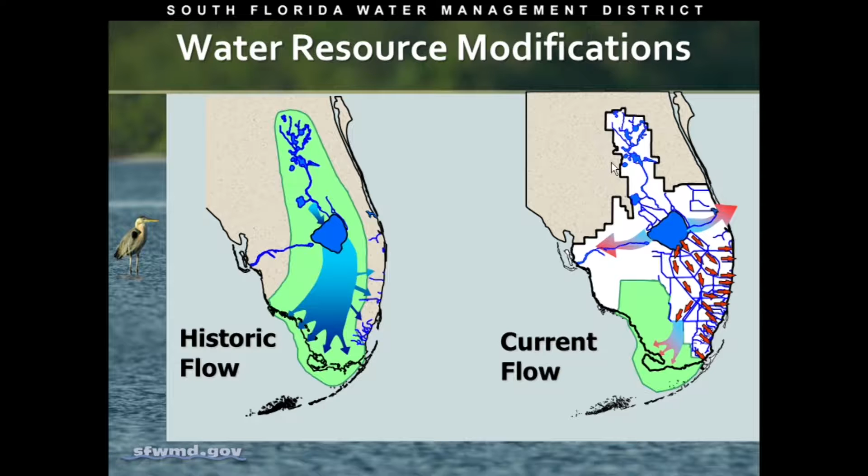The major watershed in South Florida is the Kissimmee-Okeechobee-Everglades watershed, where historically water fell and the Kissimmee chain of lakes went through the river into the lake. The lake would rise and overflow its southern boundaries, then go through the River of Grass very slowly, ultimately into Florida Bay and the Atlantic Ocean. Today we have a man-made system with the Central and South Florida Project, which has changed that delivery very greatly.

So what caused that change? Why did we have to construct that project? The historical problems leading to that were mainly the hurricanes of the 20s and the 40s. The state at that point in time asked the federal government for help. They came down and started constructing the project, which was authorized in 1948.

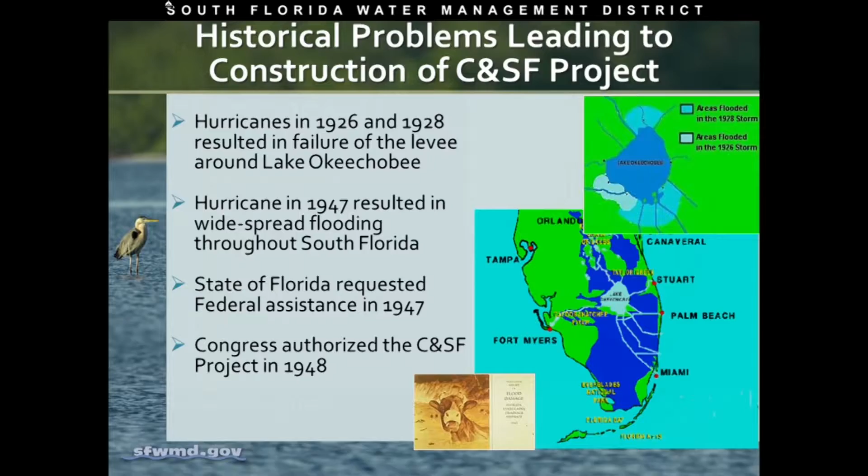The major components of the project include channelization of the Kissimmee, the St. Lucie, and the Caloosahatchee rivers; the construction of the Hoover Dike; the construction of the conservation areas, which compartmentalized them; the construction of protective levees around the Everglades Agricultural Area and the lower East Coast; as well as the construction of the drainage network, which are the canals and the salinity structures associated with them.

This is our little portion of the Central and South Florida project here in the Treasure Coast. We have the C25, the C24, and the C23 canals, and we also have the C44 canal, which is the only canal connected to Lake Okeechobee.

We have the salinity structures to the east. We have the S80 structure, which is the lock structure, and then there's the S308 structure at Lake Okeechobee, which is the structure that needs to be open for water to flow into the C44 canal and ultimately into the St. Lucie estuary.

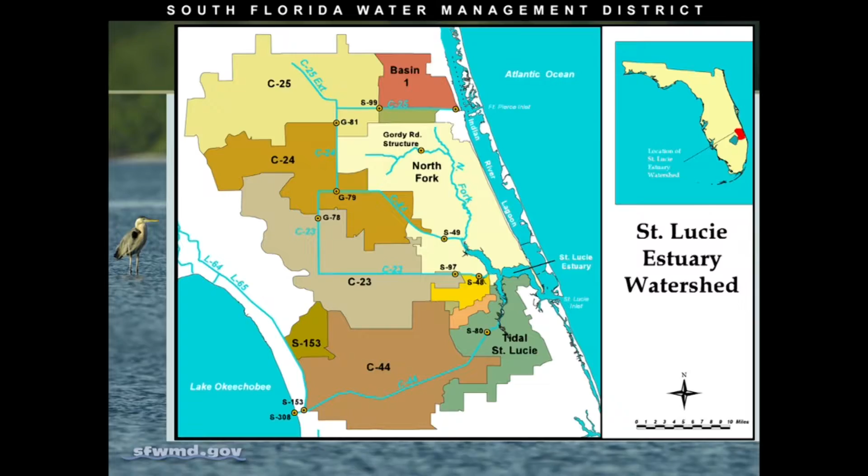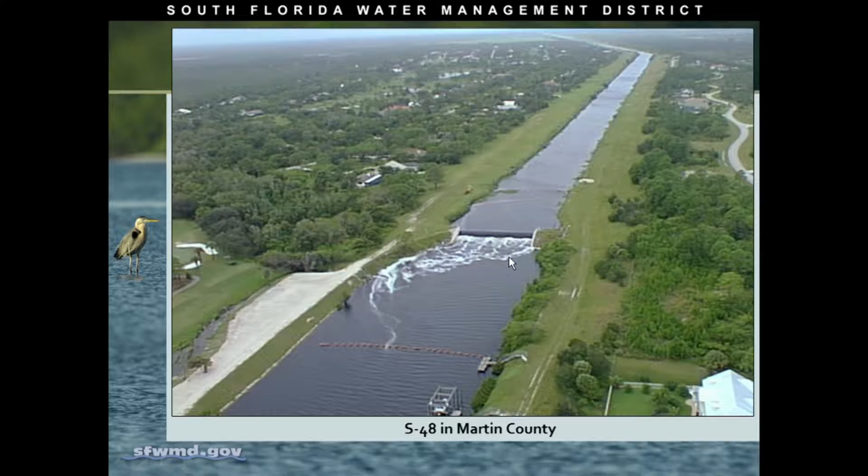This is the C23 canal, and what I wanted to show you here is the salinity structure. Each of our canals have these structures. They're non-movable structures, and they protect our water supply system from saltwater intrusion.

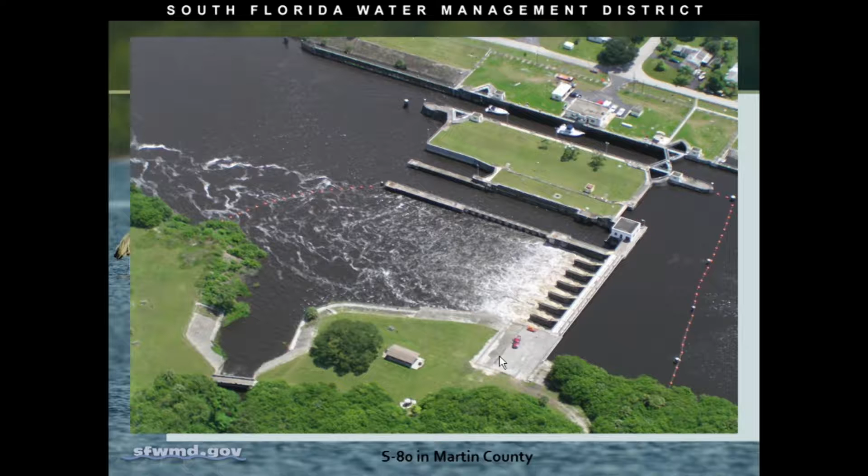This is the S80 structure in Tropical Farms. It includes the locks here, but also the water control structure, which in this picture is flowing. But just because it's flowing does not mean it is water from Lake Okeechobee. You would have to drive 27 miles west to see whether the S308 structure is open. If that structure is open, then this would include water from Lake Okeechobee. If it's not, then this is just providing flood protection for the local C-44 basin.

The Water Management District's core mission is flood protection, water quality, water supply, and natural systems, and there are five water management districts in the state.

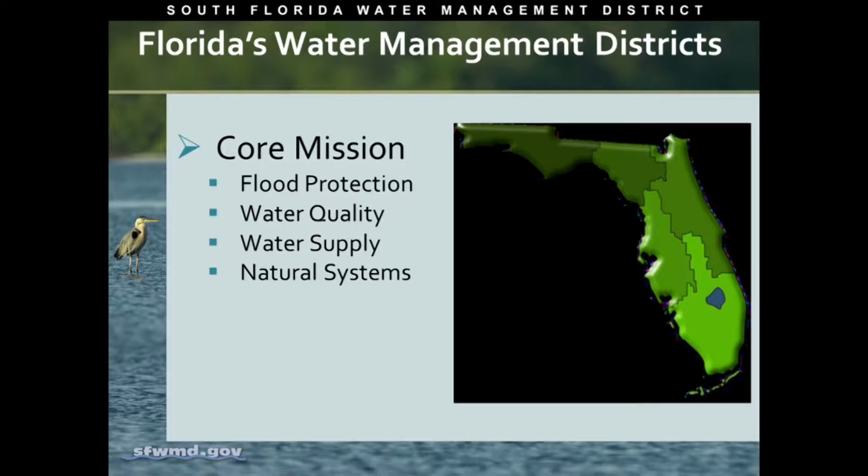The South Florida Water Management District includes 18,000 square miles, 2,100 miles of canals and levees, more than 600 water control structures and project culverts, 70 pump stations, 8.1 million residents, 3 million acres of agriculture, and vast areas of natural area.

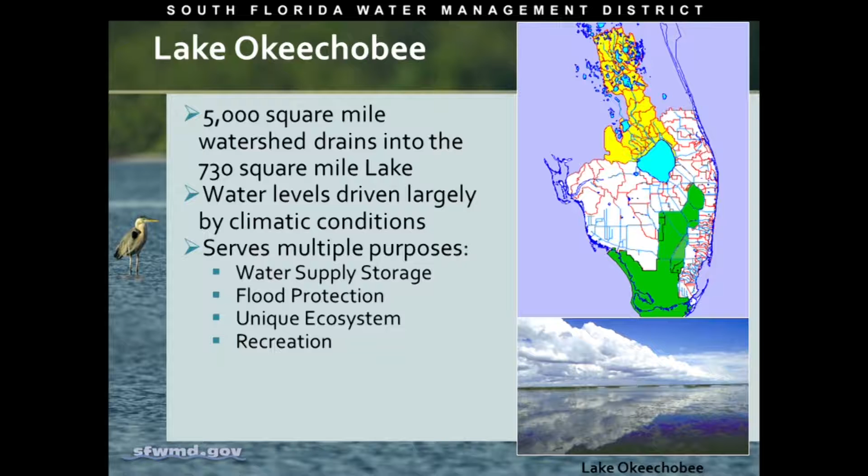At the heart of our water management system is Lake Okeechobee. It has a 5,000 square mile watershed, which is in yellow here. The lake itself is 730 square miles. It is a very shallow lake of about 12 feet. The water levels are driven largely by climate, and it serves multiple purposes.

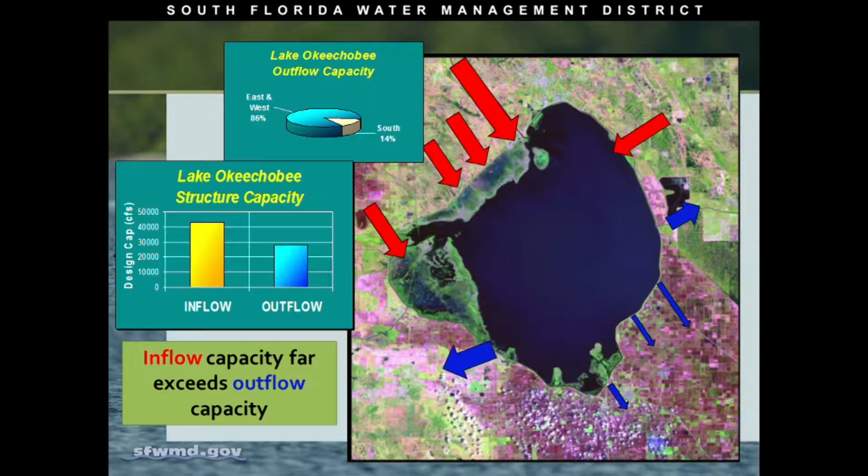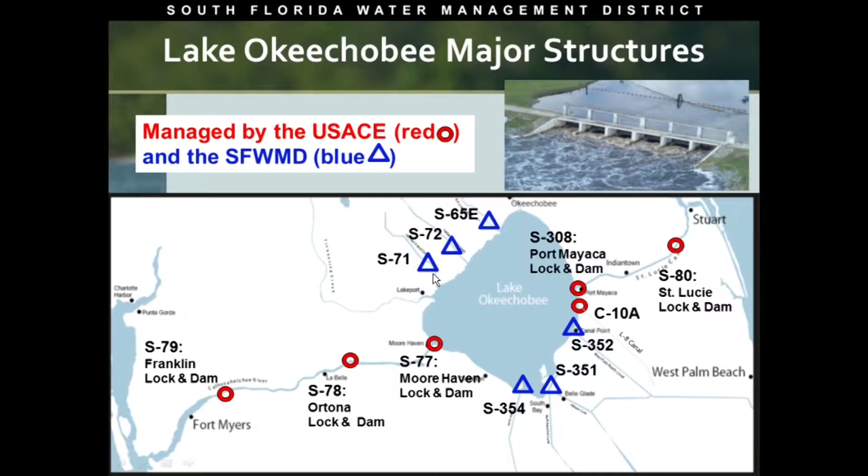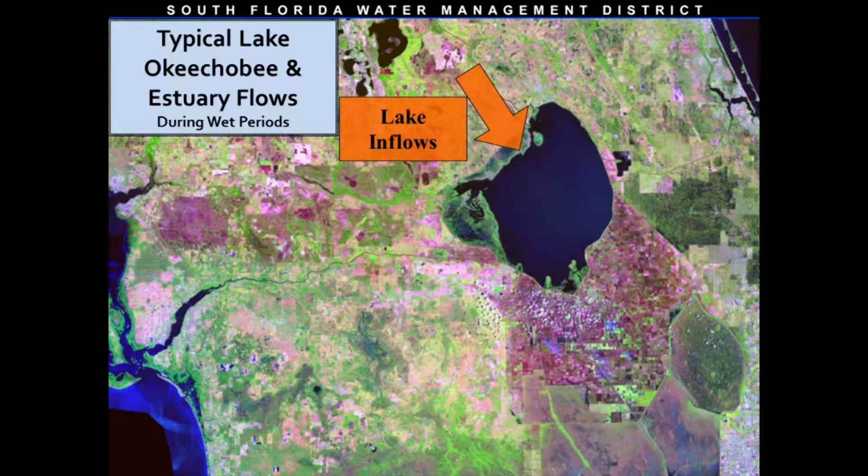I'm just going to give you a scenario on what happens with the system. So if it's raining in Florida, water comes together and goes in the Kissimmee chain of lakes. It gathers, it gets into the Kissimmee River and flows into the lake.

Runoff also gathers from the EAA, or the Everglades Agricultural Area, goes into the canal system and starts moving south. At this point in time, the lake water is released from the lake through the EAA into the water conservation areas through the stormwater treatment areas.

There's also basin runoff from the C-43 basin, which collects into the canals, goes out the S-79 structure, meets up with the tidal basin runoff, and eventually goes out to the Gulf of Mexico.

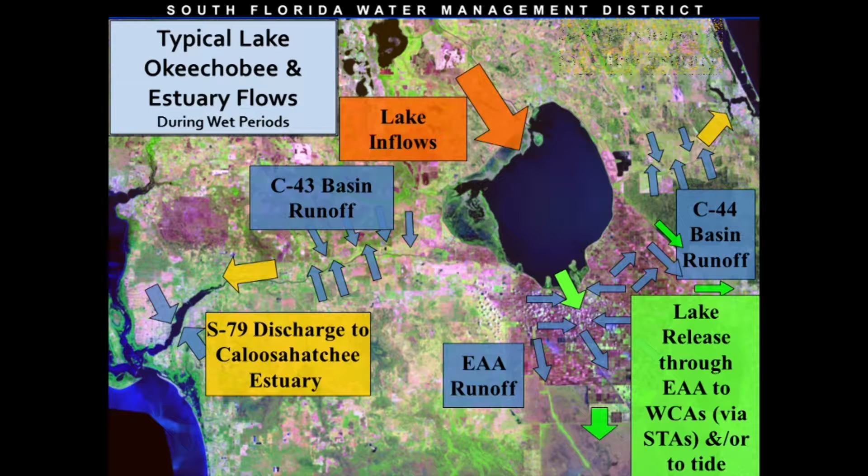The same thing happens over on our coast. The C-44 basin runoff collects, goes into the canal, goes through the S-80 structure into the St. Lucie estuary, where it meets up with the tidal basin runoff and goes into the Atlantic Ocean.

At this point in time, the system is totally full. It's working, it's doing its job, but it is full. The problem is it hasn't stopped raining yet.

So what happens at this point in time, because more water is coming into the lake than can go out, that's when they tend to open up the S-308 structure, which provides way too much fresh water into the system and aggravates the estuary. The same thing happens on the west coast through the S-77 and the Caloosahatchee.

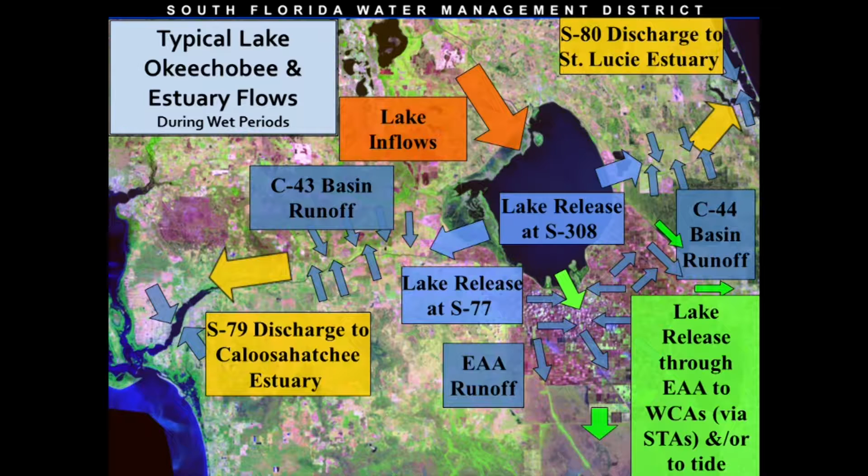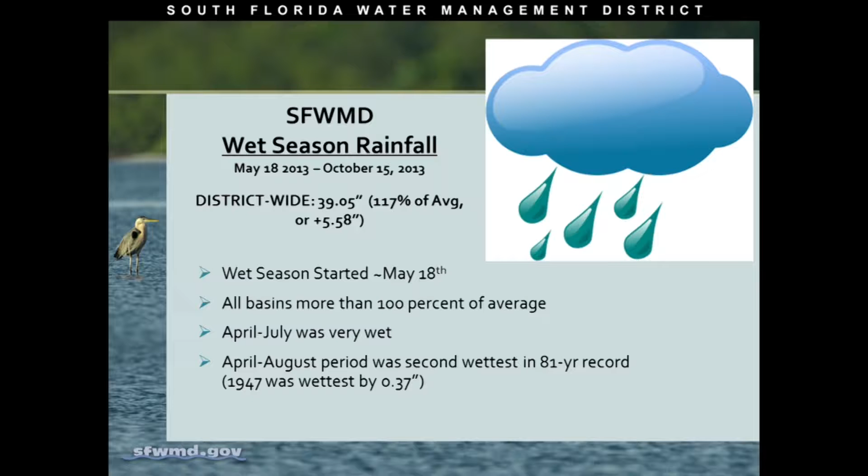If we go back to 2013, through the wet season, we had a tremendous amount of rainfall then. District-wide, it was 117% of average, or 5.5 inches more than we usually get. The wet season started a couple of weeks early, on May 18th. All basins were more than 100% of average. April through July was a very wet period, and the April through August period was the second wettest period in the 81-year record.

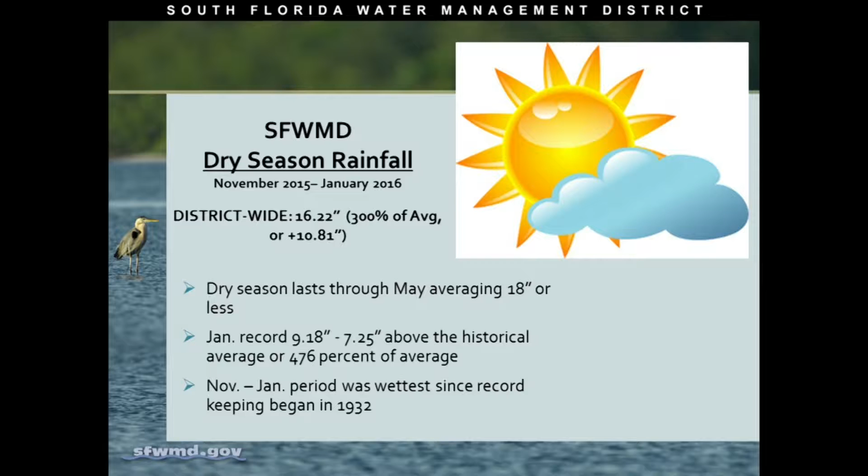Now, if we go to this dry season, just the November to January time period, we had so much rainfall. We received 16 inches of rain in that 3-month period, over 300% of average, or more than 10 inches, almost 11 inches more than we usually get. The dry season lasts through May, and we usually only average 18 or less inches for that whole time period, but in 3 months, we received almost all of that. There was record rainfall in January, which was over 7 inches above the historical average, and the November to January period was the wettest since record.

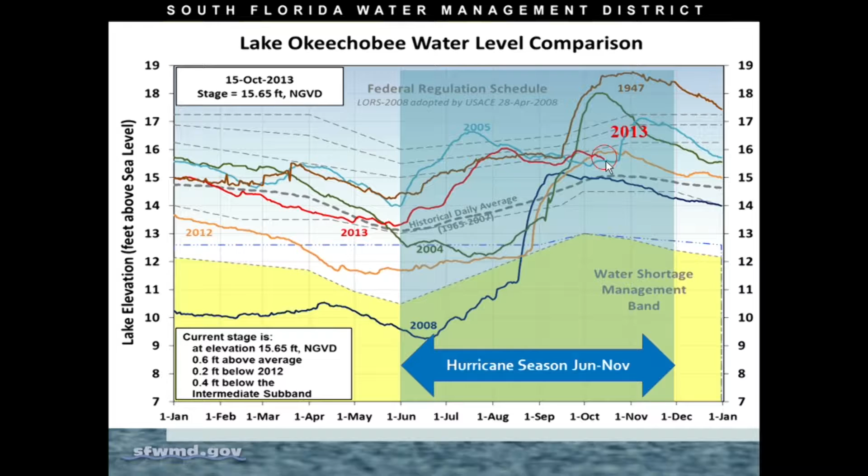And of course, this is the lake regulation schedule. I went back to 2013 because this shows how the Corps decides what to do with the lake. This is just a snapshot in time, showing in the middle of October, the lake is still dangerously high at about 15.5 feet, and we still have a month left for hurricane season. That was a decision that caused them to continue releases from the lake at that time.

There are other constraints besides the facilities themselves that limit discharges south. We have the treatment capacity of the stormwater treatment areas, designed to hold between about 6 and 18 inches of water. If you put more water in them, the plants will die and the treatment won't happen, so you have to be careful. We also have flood control in the Everglades agricultural area, since we must provide flood protection for everyone in our district, including the farms. We have protected species to watch out for, like the Cape Sable seaside sparrow, which nests on the ground, so we can't push water through their nesting areas because it would hurt them. There's also the integrity of the water conservation area levees, which protect the urban areas east of them. Water levels in the Shark River Slough and discharge capacities of facilities to the south are also constraints. These are just some of the many constraints to moving water south.

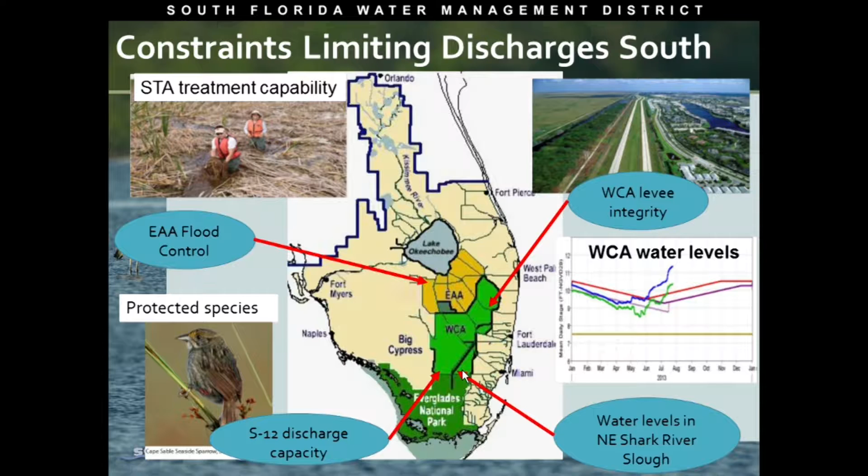This is an annual chart showing water discharges to the estuary: blue is the C44, red is the C23, and green is the C24. It's just an annual total, but you can see by looking at it when Lake Okeechobee discharges happen, these big spikes here, and probably a lot of these larger spikes as well.

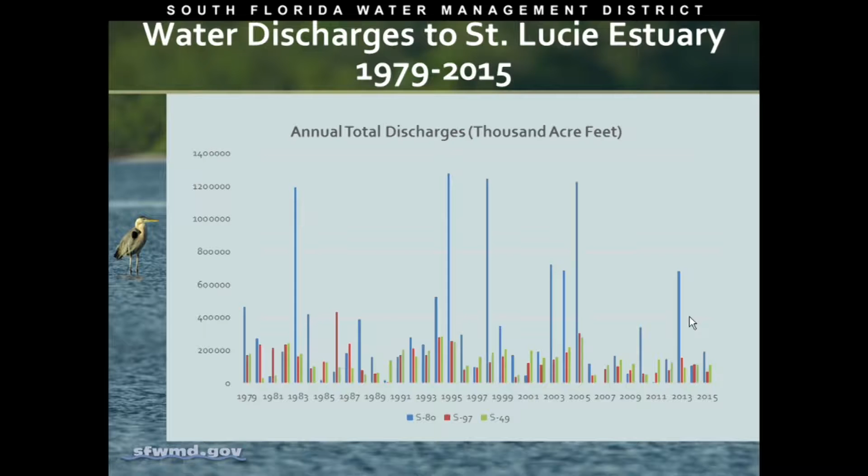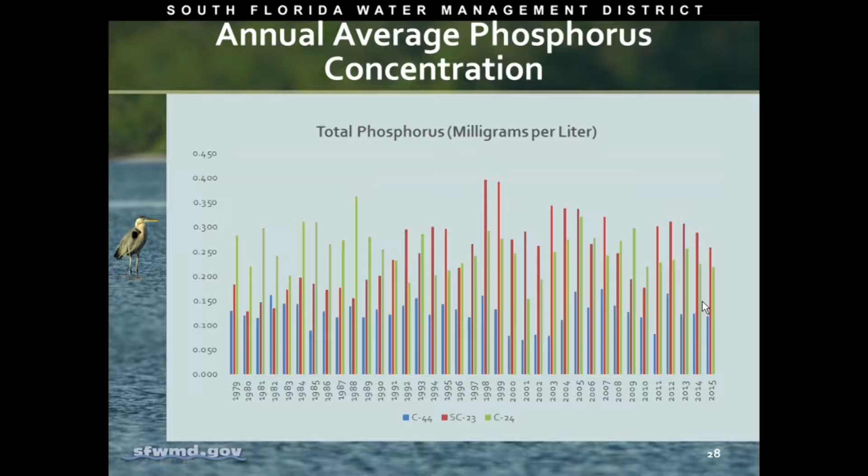This is the total phosphorus data. If you look again, you'll see the C44 is actually in pretty good shape. Our total maximum daily load is about 0.125 here, and it stays pretty low, almost below that at times, whereas our local canals, the C23 and 24, are much higher.

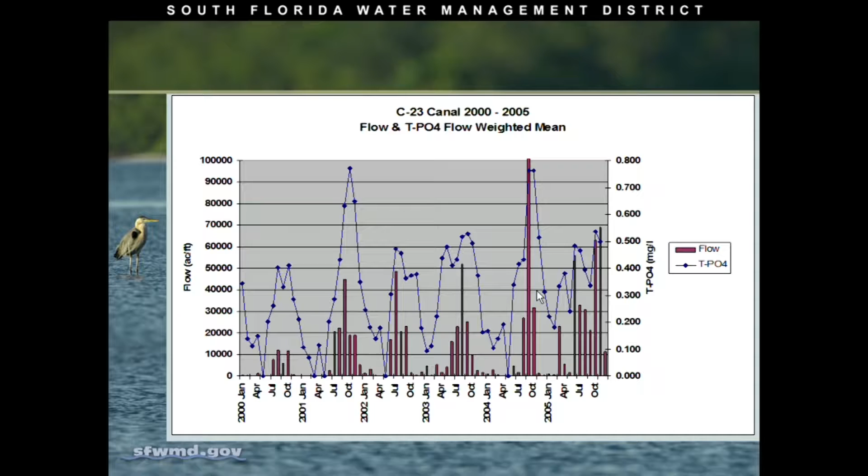This just shows there is a relationship between rainfall and nutrients. The flow is the bars, so when it rains, the nutrients go up, and when it doesn't rain, they go down. That's typical of any basin.

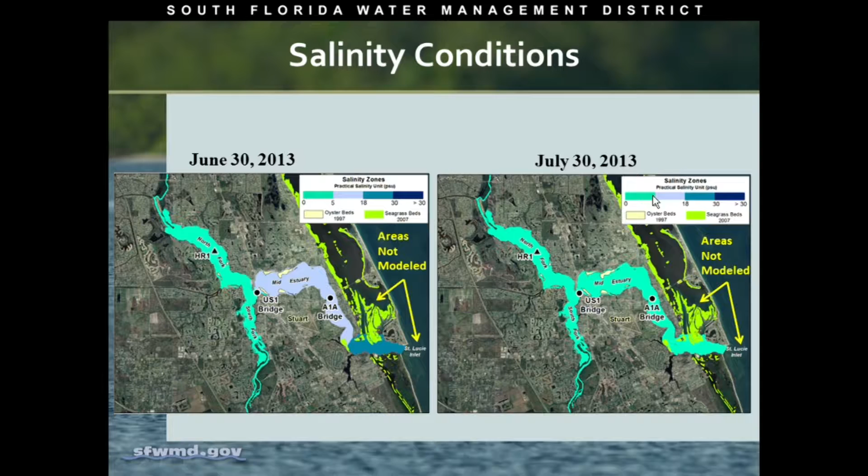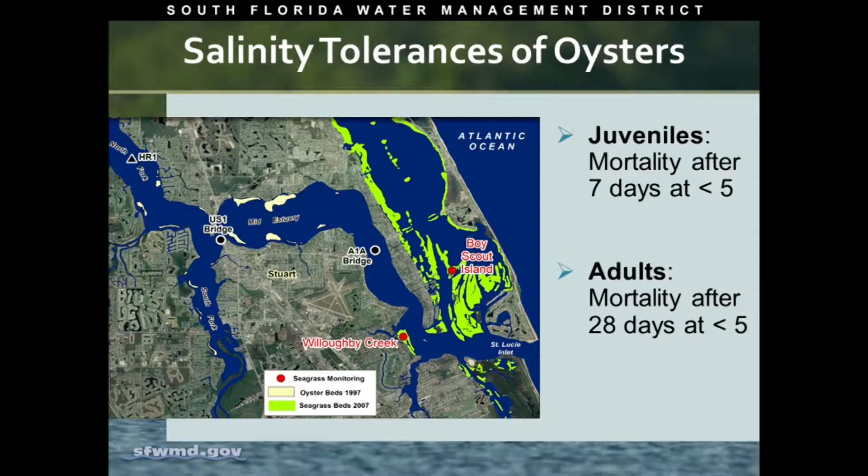Nutrients are a problem, but so is the great amount of freshwater coming in through the lake. Again, this is 2013. In June, the North and South Fork estuary conditions were pretty much fresh, but the middle estuary toward the inlet was still okay with salinity concentrations. Just 30 days later, the entire estuary went to almost zero salinity. Why is that bad? Because oysters can't tolerate it. The juveniles die after about 7 days of salinities less than 5, and the adults can only handle about a month.

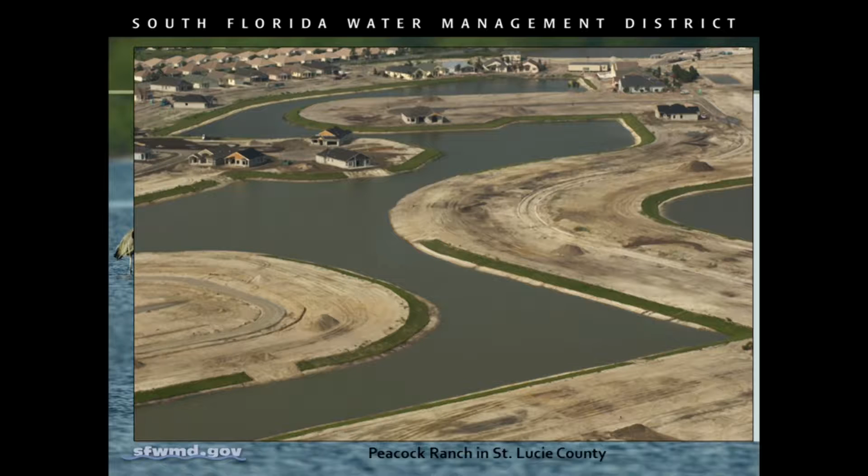So why do we get all this freshwater? Through development—this was Peacock Ranch in St. Lucie County, which was pretty much 100% pervious. Developers come in, fill the house pads, and start building, and by the end we have more impervious area than pervious area. When water hits these roofs and roads, it runs off faster, quicker, and a greater volume of it gets to the estuary than if it was a pervious area.

It's also the way we treat our households. We have roads where cars leak grease and oils. Our yards—we like to have green yards, so we fertilize them and put down pesticides. When it rains, the water picks all this up and puts it right into these waterways, and it goes right out into the estuary.

Now, this is a golf course, and this is a stormwater management area within it, which is very good for taking out nutrients. But on golf courses they treat weeds with a copper sulfate solution, which gets into the waterway and poisons the macroinvertebrates at the bottom. Then you have a food chain issue that again gets out into the regular waterway, into the estuary, and causes a problem there.

And we also have these intermittent ditches, and areas of septic tanks. A few years back, the district did a study on tracers using acetaminophen, which goes into the body and out of the body the same way. They tested 22 similar sites, and out of those 22 sites, 20 came up positive for acetaminophen.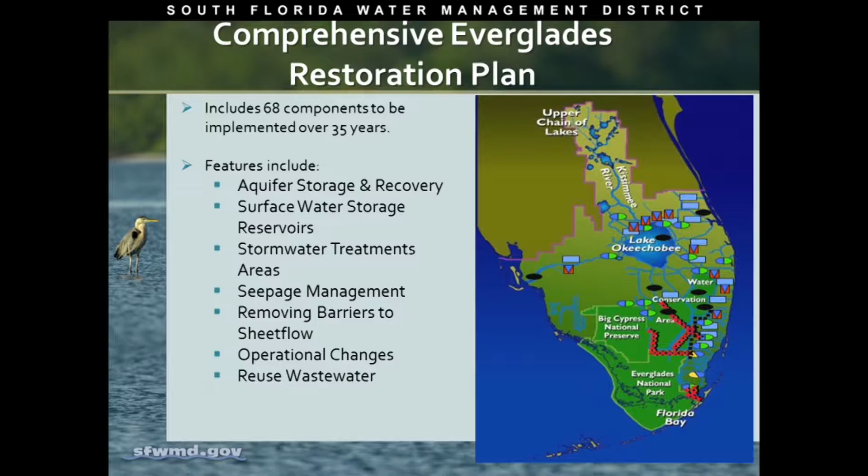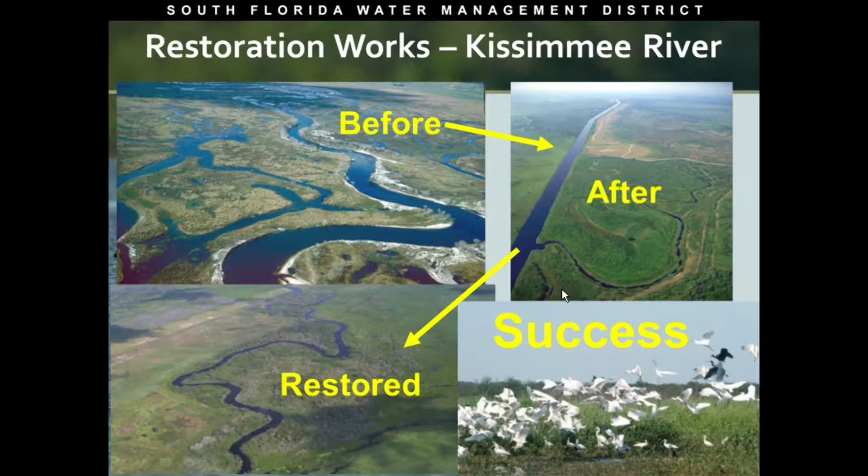Some of the pre-CERP projects include the Kissimmee River, where before the river was 103 miles of oxbows. The Corps came in and straightened it to 56 miles, so we had to go back and restore it. It's really quite a success, and it's almost complete.

Our little part of the CERP project is the Indian River Lagoon South. It includes the C-44 reservoir and stormwater treatment area. Both components are currently under construction.

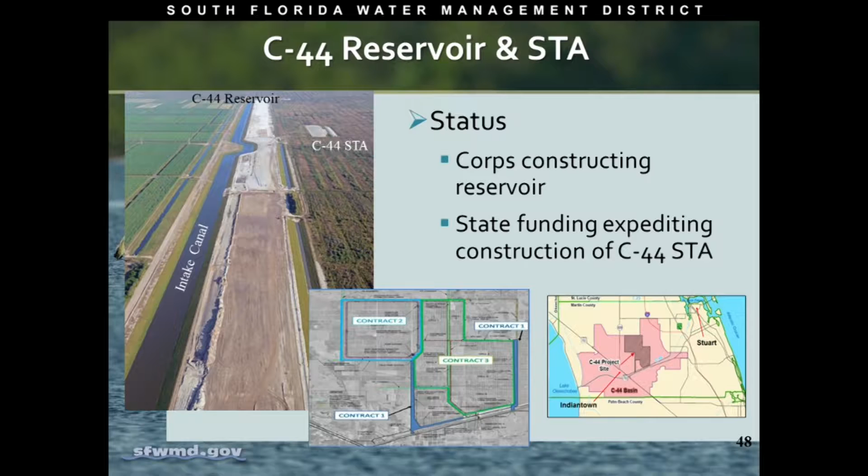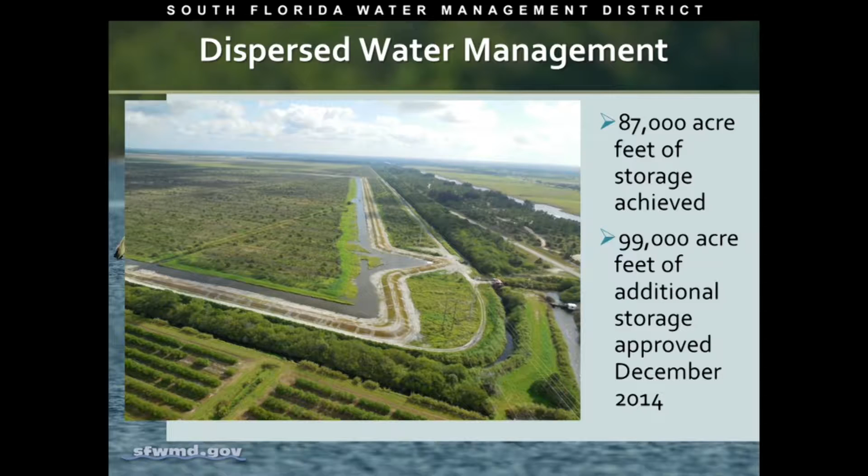This is the C-44 reservoir, currently under construction. Some of our natural land components, this is Allapattah Flats. We also have dispersed water management, which includes contracting with both private and public landowners for holding additional water—this is the Caulkins Water Farm. And we have the Central Everglades Planning Project, which will help bring water south from the lake.

And the 20-year commitment to Everglades restoration, the governor's plan, includes $5 billion in state funds over the next 20 years. So I'm sorry if I went over my time a little bit.

You nailed it. Oh, okay. If you have any questions, I'd be happy to answer.

Commissioner Fielding: Thank you so much for coming. I thought this would be very useful for us to see.

The district has helped us. I know some have had unkind things to say at the moment, but the district has helped us in facing this current problem. We can't magically do something we wish we could do, but we've got this problem, so we appreciate what the district has done. And the underlying thing, as I see it, is that you've allowed the Army Corps more flexibility because you've helped keep water from coming into the lake, putting pressure on the Army Corps to release, because we're higher now than we've been, I think, ever at this time of year, while the lake has been under a management regimen. So y'all have really been very helpful.

Now, in saying that, if we're going to try to fix this thing, we've got to really step up to the plate. And one of the things we're going to have to recognize is that TMDLs won't cut it. TMDLs, total maximum daily load, that's just a prescription to allow polluters to continue to pollute. That won't cut it.

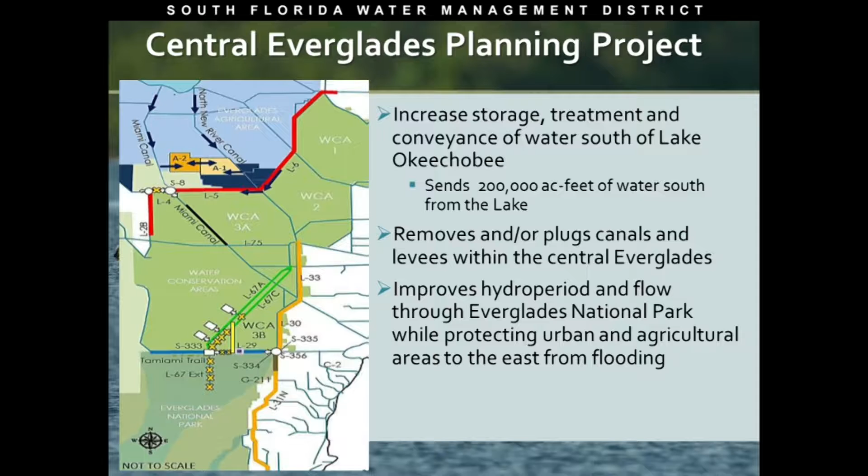So it is that important, combined with Tamiami Trail and some other components, it will help some. Yes, and that's the next component to get approved. Thank you. Commissioner Haddox?

Kathy, thanks for being here. And I'm going to vent frustration, not just with South Florida, but with everybody, because I think our constituents are upset and angry. We went to Washington, D.C. a few weeks ago. We asked the federal government for the president to declare a state of emergency. We didn't get that. We wanted it because it could have helped our small businesses recoup financial losses, and because it could have paid for testing of what's been bestowed on us, and now we're paying for it instead of the federal and state governments.

We asked for help from DEP for testing, from EPA for testing. We asked the governor to buy land in accordance with the University of Florida's recommendation of 500,000 acre-feet north of the lake and 500,000 acre-feet south of the lake. We don't see anything happening on that. We asked the Army Corps of Engineers, in conjunction with immediate problems, to stop the discharges completely for a two-week period to let our estuary, rivers, and lagoon flush. And what we've got is a great big zero.

You've given us some help with storing additional water north, which we appreciate. But when I hear 35 years, I think about the group of river kids, probably between 8 and 16 years old - those kids are going to be 50 in a 35-year time frame, with their own kids fighting what they're fighting for right now. That is ridiculous. What we need is for the federal and state governments, as Commissioner Heard stated, to accelerate the entire process, fund it, and get it done - get the final solution funded and completed.

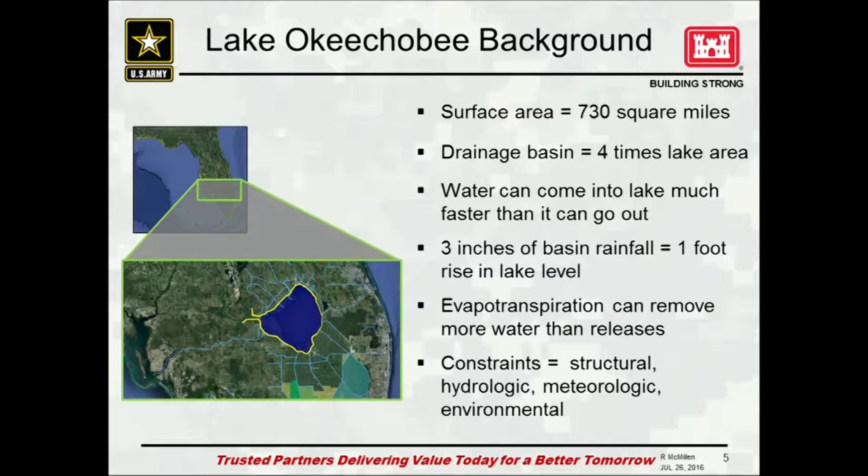And the constraints on the lake, as my colleague presented before, we have a number of constraints on the lake: structural, hydrological, meteorological, ecology. We look at all of those things when we come to our releases on Lake O, and I'll discuss that in a moment. Just to give you a quick snapshot, a pictorial of Lake Okeechobee and the structures that we manage in order to reduce the stages within the lake.

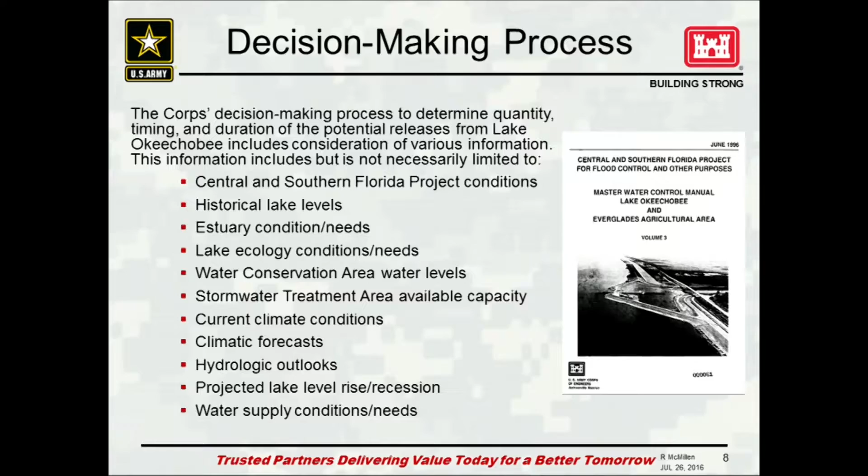We look at the projected lake level rise, and one of my last slides will show where we expect to be at the end of this year. We look at the water supply needs south of the lake. As you recall, last year there was a tremendous water supply need because we were in a drought last summer, so we pulled a great deal of water out of the lake for the farmers.

Lake Okeechobee regulation schedule. It's hard - can they see that arrow? Yes, they can. Okay, let me try and capture this for you.

The areas in red are where we do not want to be. At the top of the screen, you'll see this dark band - that's the high lake management band, which means you can expect high releases if we get above that. It's broken out into three areas: high, intermediate, and low. If we get above the yellow line, there are certain measures we have to start considering as far as managing that lake. We have to start doing inspections around the lake because we're concerned about dike failure.

Where we'd like to be is in the area of the green and the yellow. We do not want to get outside that if at all possible. The preferred range for managing the lake right now is between 12.5 and 15.5 feet. What we've found is that this helps with the ecology, helps with our dike safety, and also sets us up to provide low volume releases to the estuaries as needed, rather than the high volumes you've been experiencing.

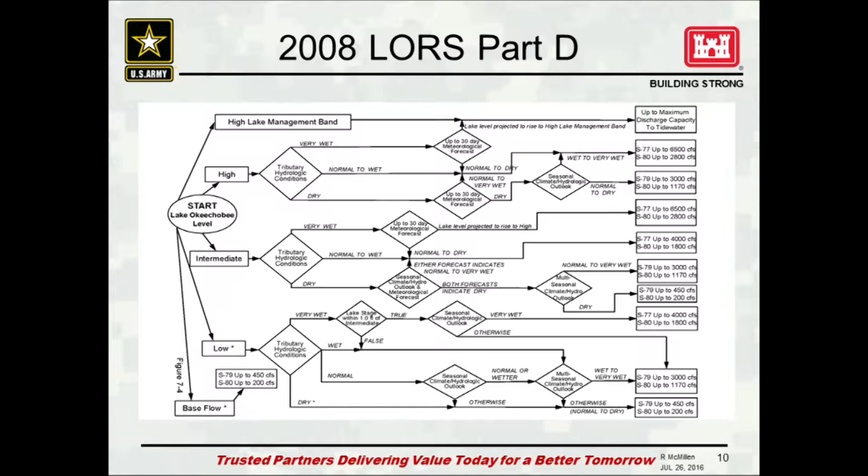What I want to point out to you is that one of the primary differences between LORS 2008 and the way we operated the lake before under WSE is that with these up-to limits, we have the operational flexibility to manage within those up-to limits.

Whereas before, there were some up-tos, but it was pretty much a hard and fast rule as to what our releases were going to be. And if we wanted to change those, that's where those deviations came in that we had to process. That took up a great deal of time, and we weren't very quick at those deviations.

Unfortunately, that's our process. The other part of LORS is what we call LORS Part C. This is what tells us how much water we can push south, not so much how much, but can we push water south into the conservation areas.

You have the same bands as you saw before, but generally we wind up in this little block right here: maximum practicable to WCAs.

Those conditions are dependent upon what is the condition in those water conservation areas. Today, Water Conservation Area 3A is about half a foot above schedule. Conservation Area 2 is about four-tenths of a foot above schedule. Conservation Area 1, which is the smallest of them, is actually about four-tenths of a foot below schedule.

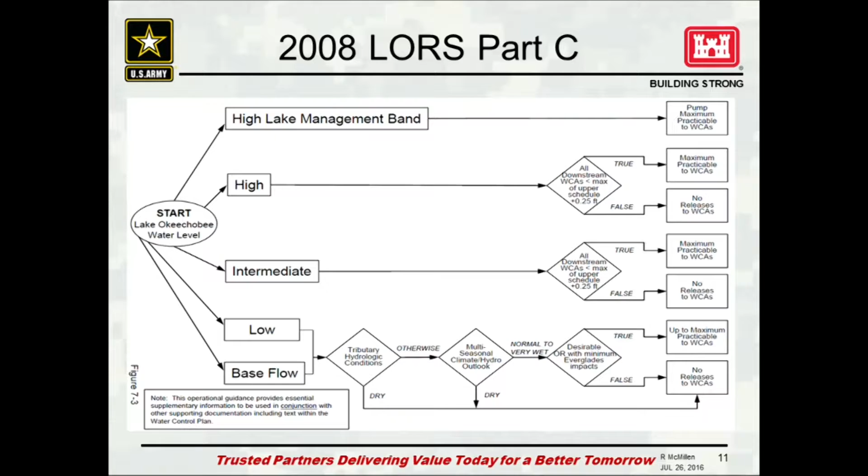So when they are below schedule is when we have the opportunity to push water into the conservation areas and then push it either south or start pushing it to tide. Sometimes we use the conservation areas as a pass-through. As it comes out of the STAs, cleaned up, it pushes into the water conservation areas, and then we can push it to tide through other various structures that we have in South Florida.

At S80, we've moved 820 CFS to St. Lucie Estuary. S308 moved 940 CFS. The reason S80 is lower than S308 is because of water supply. We have FPL up there that's pulling water for their facility. So we will move water out of S308 to accommodate water supply.

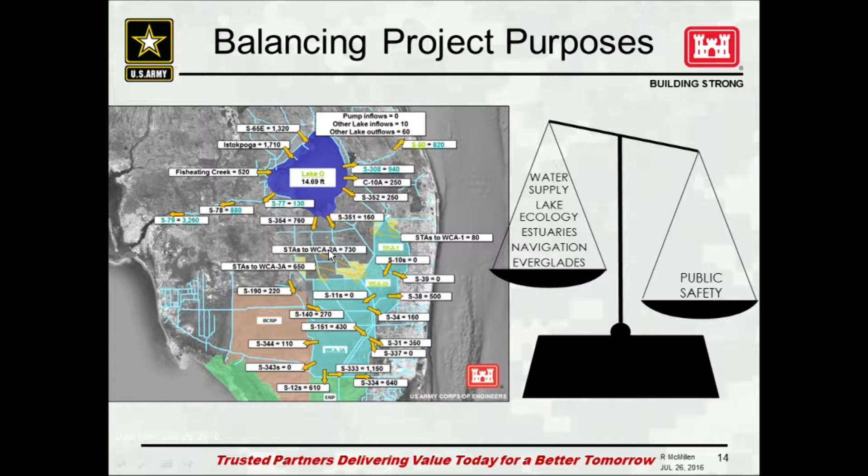The last time we had this kind of rainfall was 1997, 1998. In December, there was 200% above normal rainfall south of the lake. Our lake held steady until mid-January. In January, we started experiencing record rainfall on the lake and in South Florida, 18 inches of rainfall. That goes back to 1930, the highest record rainfall on record. So this is one of those abnormal years.

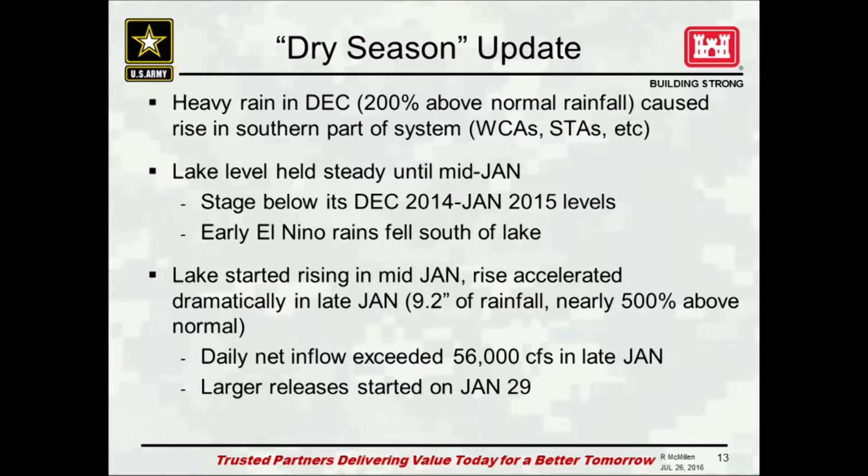The stage in the lake held steady until mid-January. In mid-January it started rising, 500% above normal rainfall on the lake, in the watershed basin. At one point in late January, we were seeing inflows of 56,000 CFS into the lake. Compare that to the releases today of 500 CFS, that's a release decision at S80, at target at S80. So our lake started rising significantly.

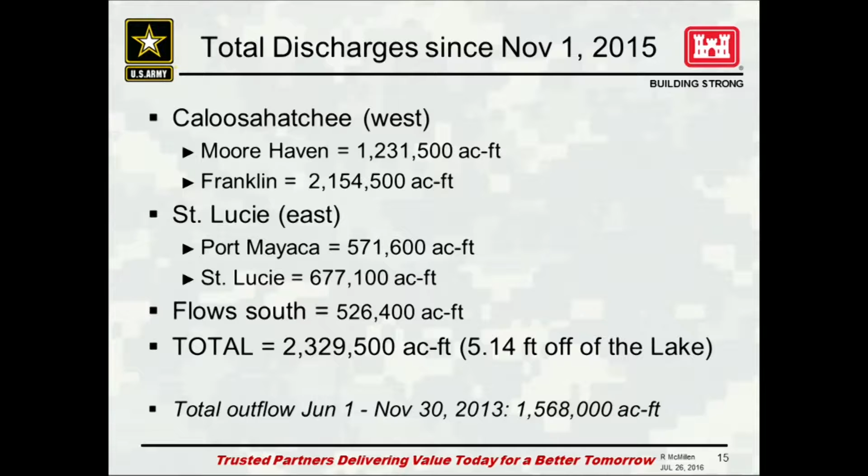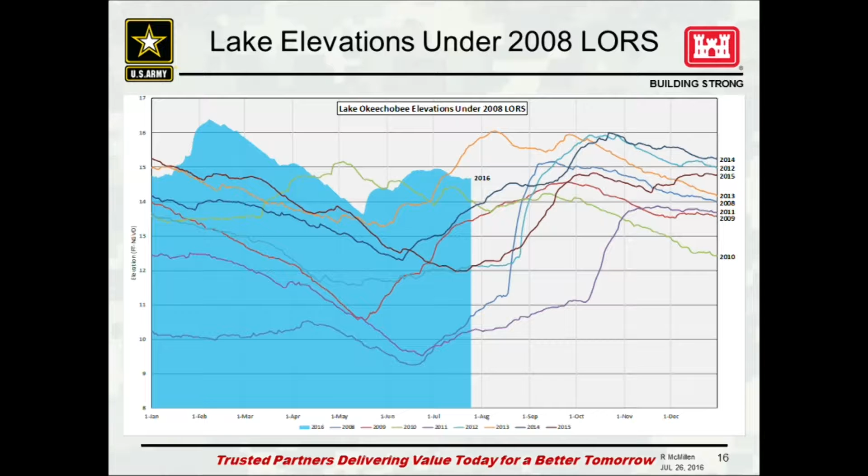That is our concern if we see those kinds of jumps. That's one of the reasons why we continue to release right now, to the extent possible.

Everything's conditional upon the rainfall and storms that come at us. These projections are based upon a period of record from 1965 to 2007. So you can see why we are so concerned right now—we're not out of the woods yet on that lake, and we're not even at peak hurricane season yet.

When the lake stages get above 15.5, we start performing weekly inspections of the lake, looking for seepage and some of the boils. We have a good history on that dike of where we'd potentially see those concerns. At 16.5, we'll be inspecting the lake daily. When we get up to 17.5 feet, that's tremendous concern for us.

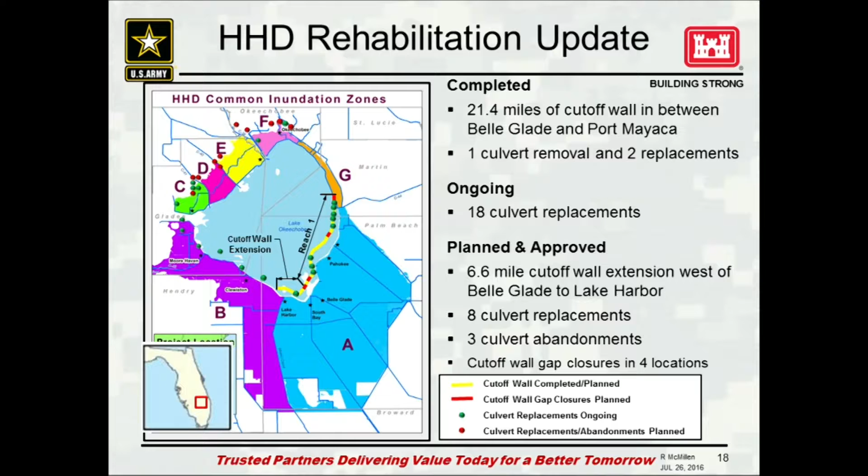Do we have any idea what the cost of that is and what the value of those projects are? I do not have an actual specific cost for Reach B. I think we're still working on the ultimate scope for that, Commissioner Scott, but I can attempt to get you an answer.

That would be great. Commissioner Scott discussed when we were in DC that we were there asking for specific things to happen, and you mentioned that until Reach B is done, we're not going to revisit the lowers again. Right, we're also asking for the lowers to be revisited. So the quid pro quo is that we need to know how much B is.

And we need to know how soon we can get those funds appropriated, and who is the proper channel to appropriate. I know that you do not know, I understand that, but some of the folks you mentioned earlier that were here recently are. We need to be really succinct in our ask so that we can help you help us.

Because until B gets done, and other portions too, but if B is the specific issue that gives us a larger range, then that has got to be the first thing we all focus on. I think that was the message we left in DC, but I kind of wish we'd had this conversation prior to being there so we could have been more specific in the ask. But as soon as you can get us that number, I think this entire community will be committed to doing so.

And I also, it was just a curiosity question, I think FPL had agreed to take on more capacity in their lake. Is that what the transfer of those amounts of water were that you mentioned earlier? I'll have to look into that for you and get back to you.

I see a shaking of the head from behind you, so I'm assuming... that, because I had understood it was... this kind of a shake, not this. Because I had heard two to three weeks ago that they were going to take on more volume, so I'm assuming that's what that was. Okay, thank you very much.

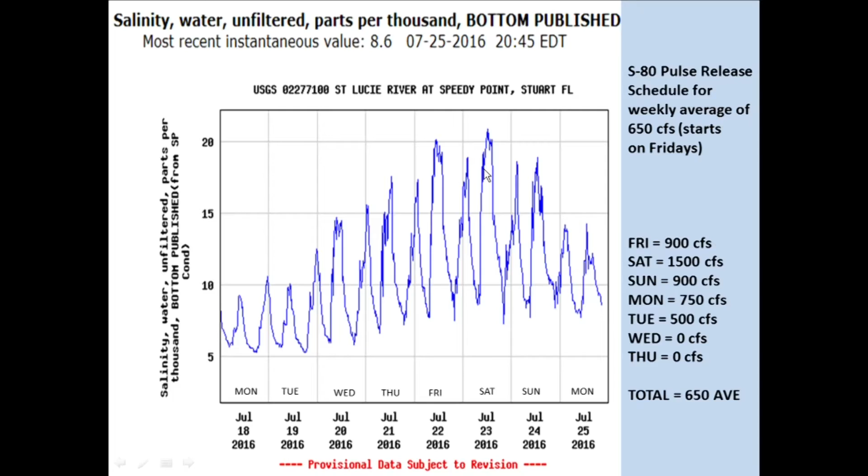Moving into the air quality testing, Martin County contracted for air quality testing, as previously reported, with EnviroTeam North America. We sampled at 4 sites, 2 residential and 2 business sites, and we tested for hydrogen sulfide, species of algae, toxin levels present, and respirable particles, to determine whether or not the algae could be inhaled. We also took 2 water quality samples along with those air quality samples, at the Outboards Only and Central Marine sites.

In developing the methodology and approach for the air quality sampling, we received direction from the Florida Department of Health and the Center for Disease Control regarding sampling protocols, to ensure we were sampling for hydrogen sulfide and other microcystins in a way consistent with approaches they were familiar with or had used in the past.

To get right down to it, the air quality sampling conclusions for hydrogen sulfide were that levels were discernible at levels which may be intolerable for individuals with respiratory conditions and asthmatics. So if you're someone around with either one of those conditions, you might find it especially irritating.

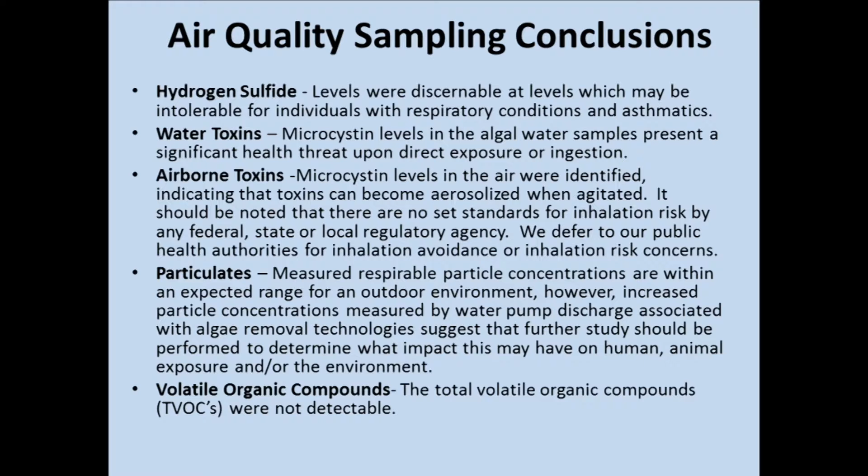So what we know now that we didn't know before is that when you have these very highly concentrated areas of this microcystin algae, the potential for very, very extreme toxicity levels exists, and we need to be cognizant of that.

Regarding airborne toxins, microcystin levels in the air were identified, indicating that toxins can become aerosolized, especially when agitated. It should be noted here, very importantly, that there are no set standards for inhalation risk by any federal, state, or local regulatory agency. So we continue to defer to our public health authorities for inhalation avoidance or risk concerns.

This is something we are not versed in. We do need support to better understand what levels of toxins are problematic. Although the ones we saw seem to be on the lower end, low levels, maybe consistent with other scientific papers that had not been levels of concern. But again, we're not the ones qualified to make that determination.

Regarding particulates, this is an important one. Measured respirable particle concentrations were within an expected range for what you would expect to see in an outdoor environment, is what our consultant told us.

However, there were increased particle concentrations measured associated with the water pump discharge from the algal removal technology happening at Outboards Only. That suggests we really do need further study to determine what impact an activity like that might have on human or animal exposure and the environment, because we did see those respirable particle concentrations go up in that area, especially downstream or downwind of where the activity was occurring.

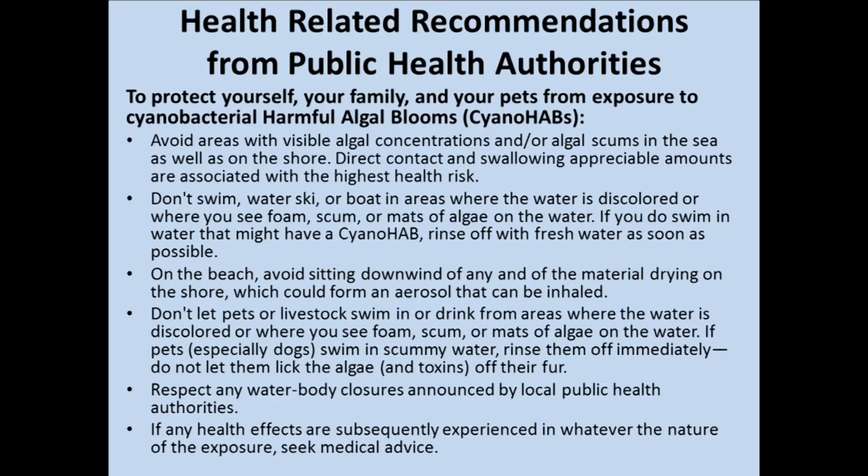We also ask that people continue to respect any water body closures announced by local public health authorities. And if any health effects are subsequently experienced, whatever the nature of the exposure, seek medical advice. Again, healthcare practitioners have been notified by the Department of Health, and they are collecting information. Most of the reports so far have been limited to upper respiratory irritation at this point.

The next steps: we provided this report to the Florida Department of Environmental Protection and to the Florida Department of Health. We have requested their review and determination on health risks and notices. The Florida Department of Health indicated today it will take them several weeks to review the report. In the meantime, our advice to the public is to avoid contact with areas with blue-green algae.

I am continuing to follow up on your request from last week to identify monitoring needs to assist in better managing blue-green algae blooms in the future and understand what our monitoring needs are. We want to take a more thoughtful approach and fully understand how we might answer some of the questions we've learned we have.

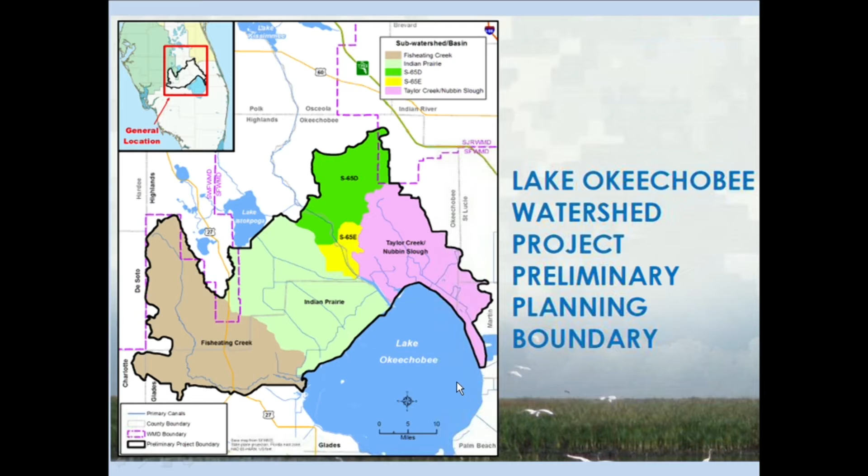One idea yesterday was to create a littoral zone on the east side, because all that vegetation on the west makes extremely clean water—we don't have that benefit on the east. So one idea is to include wetland restoration of a littoral zone to the east, to at least get some cleansing of the water as it leaves the lake and goes into the canal.

That was something I thought you would be interested in hearing. That's one of the early ideas.

The project constraints they're working under—basically rules of the road as they move forward—are that they will maintain existing levels of flood protection and water supply, so any permitted water users or flood protection provided will not be jeopardized. Cultural, historical, and archaeological resources will be preserved, environmental justice issues will be followed, and applicable laws, regulations, and standards—endangered species, navigation, and the Lake Okeechobee regulation schedule—will be considered. That schedule won't really be reconsidered until the 2022 timeframe.

That's all I have. I'm happy to answer any questions. Any questions for staff? Thank you very much.

Commissioner Hurd: I have a comment—I think we should make a comment about expanding the Lake O watershed preliminary planning boundary, expanding it to the east and west, and/or creating a restoration littoral zone on the eastern end of Lake Okeechobee to mimic the one on the western side.

We can do that, sure, why not? We have until August 12th. We'll keep you informed and make sure your input gets included.